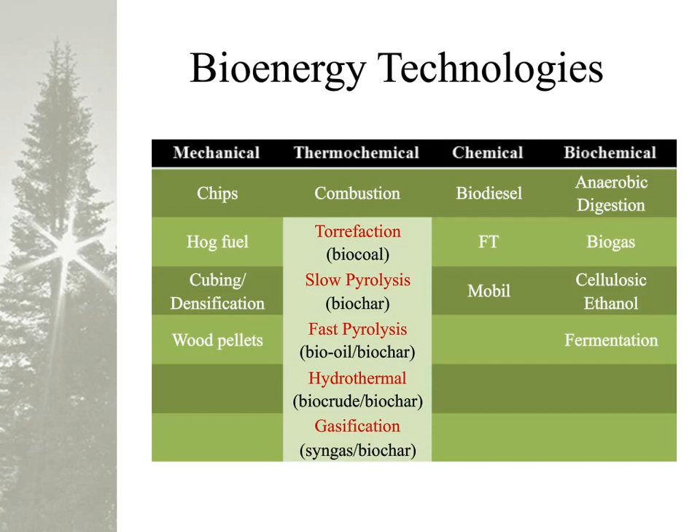In slide 7 is a graphic representation of the thermal gradient that really represents the different pyrolysis technologies. At the low end, you have various processes, including the first major one, torrefaction. Most of the pyrolysis and hydrothermal are in the black region that you see in this graph. At the very top, you have the high temperature range where you get gasification.

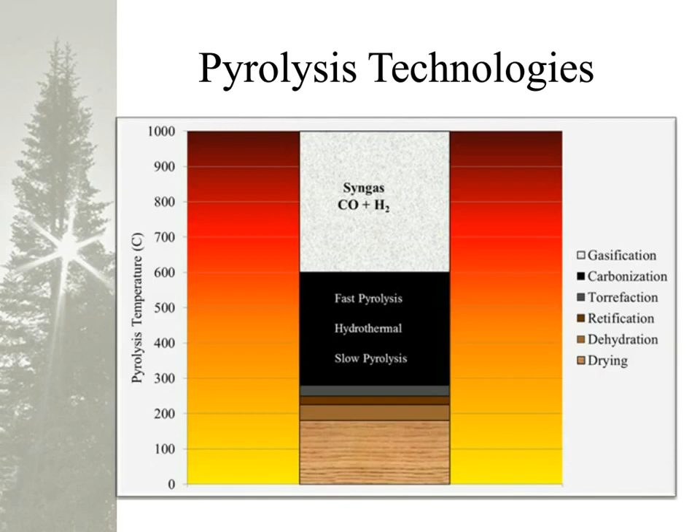In slide 8 is a summary of the over 900 ventures I mentioned to you before. I've broken down here by the different pyrolysis technologies on the left-hand side versus the various regions of the world. We won't go through all the data today, but it just shows a breakdown between the EU, US, Canada, and the rest of the world of where these ventures are found. Now, over 900 ventures is a lot, but of course, a lot of them are only virtual technologies. They're not commercial enterprises, but it's hard to tell which are real and which are not.

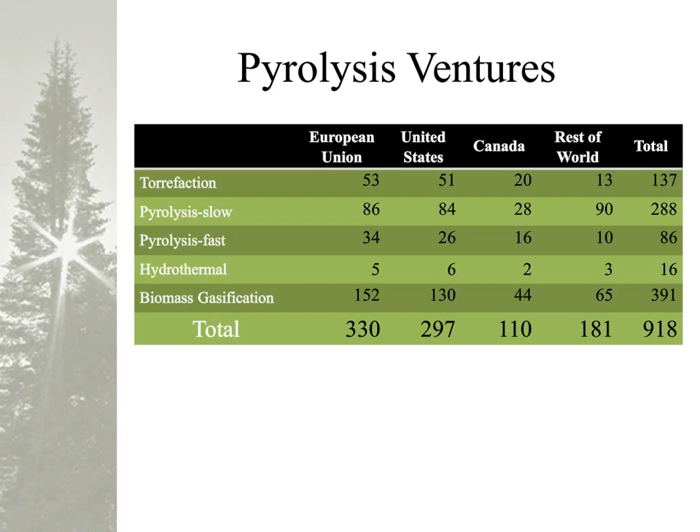The other thing we've done in this database is try to estimate the commercial stage of development of each one of these ventures. Now, this is a debatable definition in its own right. These are the definitions I've used here to separate the different ventures. The one that's probably the most contentious is what makes a true demonstration facility of a technology. Industrial scale equipment is commonly used to define it, but I've also added the category that it must be proven on continuous operation. So in the definitions I've used in the database, this is a technology that has to be run for at least weeks on end on a continuous basis, or a batch for that period of time. Very few of the new technologies actually finish this stage.

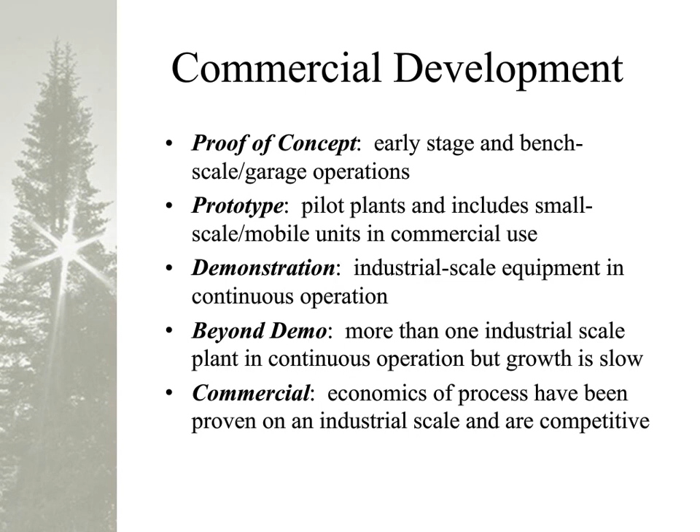On slide 10 is a brief summary of what I call the ashes of pyrolysis. Of those over 900 firms, some no longer exist. You never see announcements usually when they fail, except in very high profile cases. Where they show up is when you go to their website and it's marked under construction or it's dysfunctional.

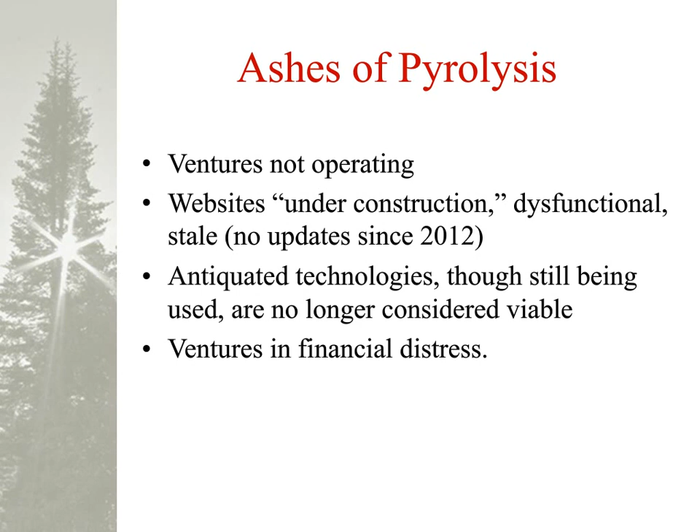Some of these have had no updates - they're essentially stale websites with no progress. Of those 900 firms, this is going into the database as shown in slide 11, an example from the biomass gasification database, where the database has the name of the company. The number beside each company is the degree of their stage of commercial development, followed by a brief summary of the technologies. Some have a lot of information available, some not very much at all. There are hyperlinks included to each entry.

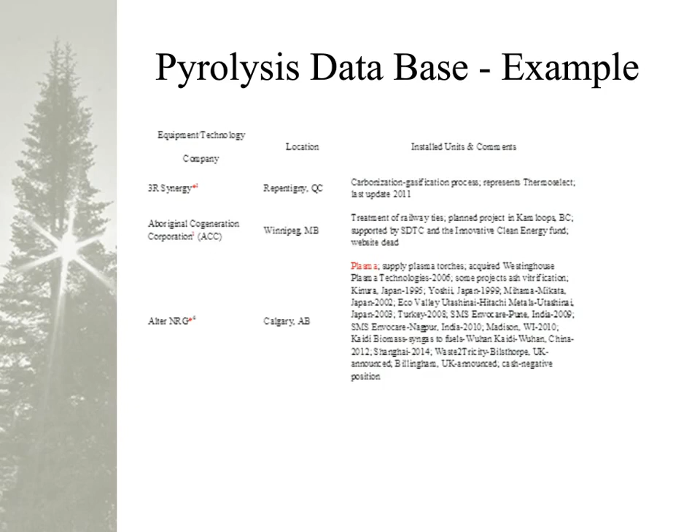On slide 12, we're looking at the different stages versus the ashes and the ones still in existence. Companies in blue represent those that still appear to be operating. The ones in red are defunct. The table divides it by the different types of pyrolysis technologies on top versus the different stages of commercial development on the left-hand side. You'll notice that pure commercial status hasn't been reached yet for any of these technologies. Some of the more interesting ones are on the demonstration side. The numbers here are much more limited, and they're certainly dominated by biomass gasification.

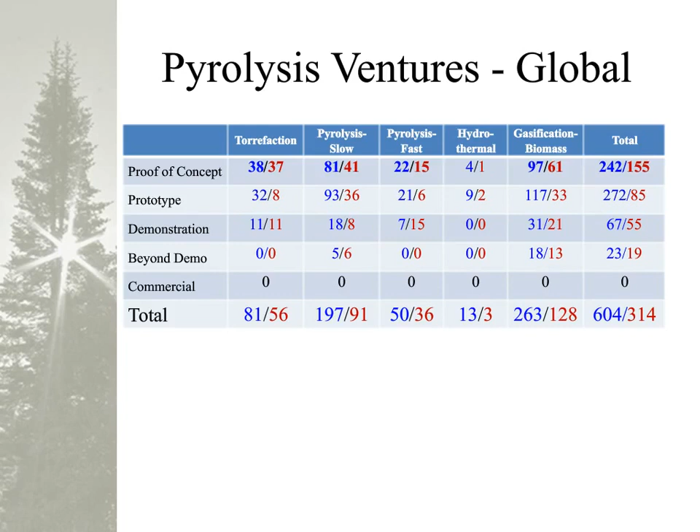I don't mean to be negative about these technologies overall, as there are some very exciting new ones coming into the demonstration stages right now, and the later speakers will talk about this as we go into the other presentations.

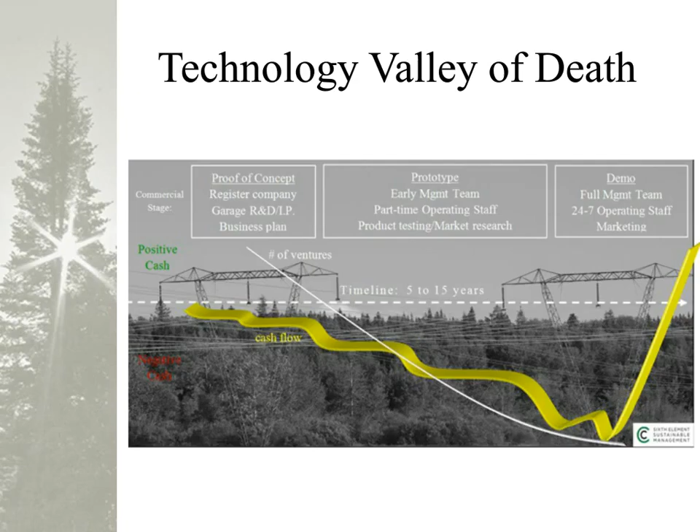That concludes the presentation I have today on pyrolysis commercialization.

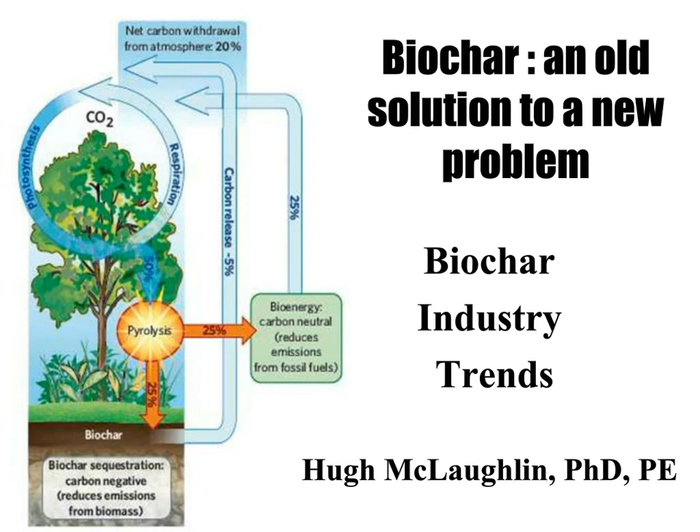I want to establish firmly in people's minds, on slide 17, that a tree operates in essentially a short-term carbon cycle where carbon is cycled from the atmosphere as CO2 gas, through photosynthesis, to become biomass and energy for the tree to live. At the end of the tree's life - and this can happen during the tree's life too - there are sugars produced that are extruded out through the roots, feeding microbes, etc. So there's ongoing respiration, and at the end of the tree's life, it has accumulated biomass, but that biomass will rot. Ultimately, a tree is in a neutral scenario because the carbon spends part of its time in the soil and part of its time in the atmosphere, oscillating back and forth.

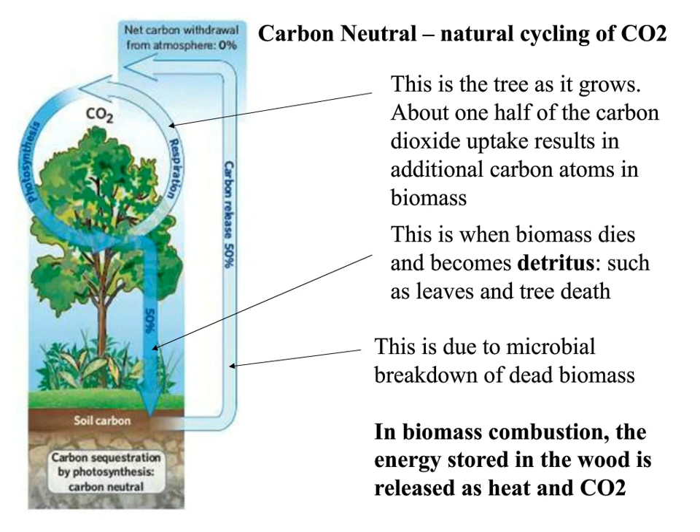On the next slide, 18, if we look closely at a tree's operation - and these are generalities - if I look at 200 carbon dioxide atoms in the atmosphere, the tree will fix them through photosynthesis and then turn around and use about half of that sugar for its own daily diet.

And then the other half will be used either to create additional biomass, additional tree structure, or being used to grow seeds, or being used to feed soil microbes. But if we note up just above the top, it says net carbon withdrawal from atmosphere 0%. And indeed, everything is cycling around.

Now, de facto, if instead of letting the tree die and fall on the ground and rot from microbial activity, we were to harvest that tree and use it for a fuel source, we would in fact be getting essentially the same carbon dioxide cycle. We would, however, be gaining some energy by burning the wood, and we would be displacing some fossil fuel requirements.

So in a perfect world, if we replaced all of the fossil fuel uses with biomass sources, we still would be essentially at a carbon neutral balance for the atmosphere. We would have no mechanism for drawing down the atmosphere.

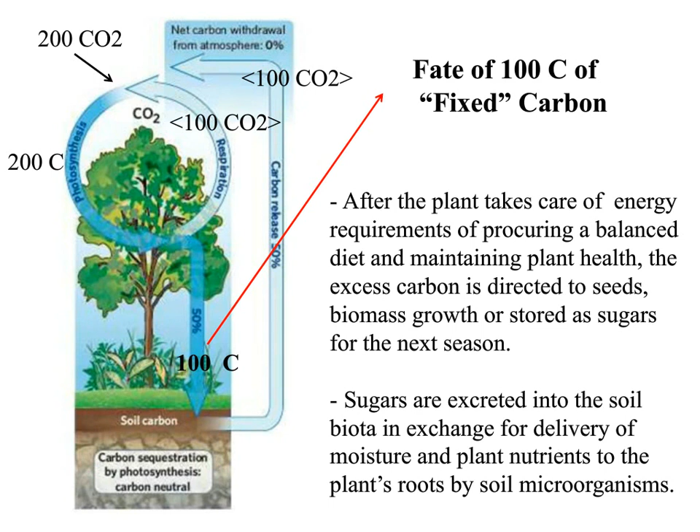And this is where biochar distinguishes itself. If I intervene, as shown on slide 19, at the end of the biomass life—I'm not advocating cutting down living trees, but they're all going to die eventually and they can be harvested.

And we intervene with the carbon and put it through a process called pyrolysis. This is where we gasify or pyrolyze the wood, heat it, devolatilize it, pulling off a gaseous fuel stream, and then convert the solid residue into what's called biochar. That process is called carbonization, making a more carbon-rich solid.

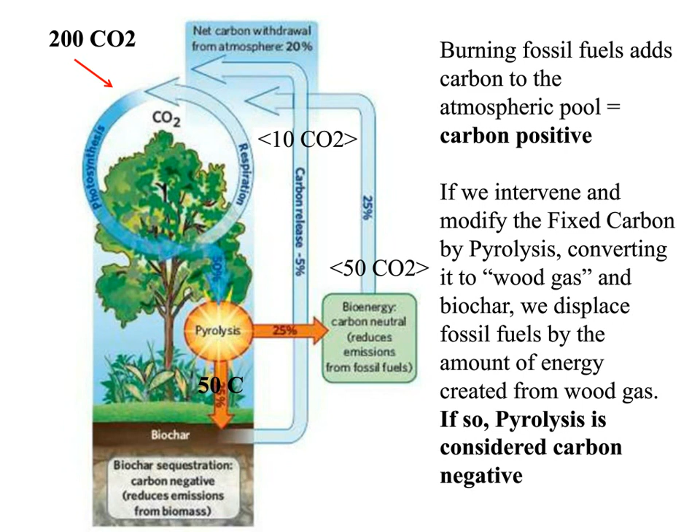So on slide 20, we note that the net effect is that we can pull 20% of all the carbon atoms that the tree ever even encountered, that it ever extracted from the atmosphere, and deposit them in a stable form in the soil. Basically what's happened is the carbon in the carbohydrates and in the lignocellulose has been converted to graphite. And graphite is an extremely chemically resistant and biologically resistant form, and it remains in the soil.

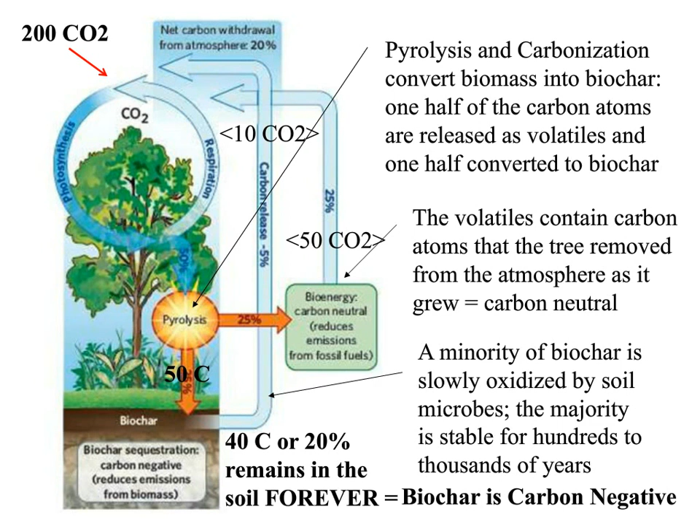And this is really a very pivotal distinction that I need to point out. Biochar and charcoal are chemically quite similar. The difference comes down a little bit to use. Charcoal has basically been optimized to be a fuel, and it's produced at a much lower temperature than biochar.

So charcoal and biochar are both black. Charcoal and biochar are different. And that's a key concept, and it really prevents charcoal industries from selling their fines into the soils and having substantial benefit that we can obtain with a good biochar.

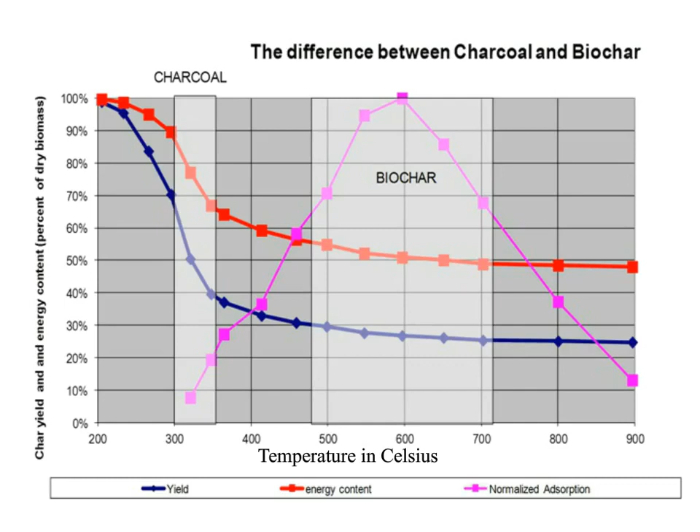So on slide 22, I reemphasize that the real effect of pyrolysis is to have taken some of that uncharred organic matter and converted it into a graphite-rich form, which now has some very unique properties in the soil. But the most important property from the climate standpoint is the fact that it is going to be resistant to biological decay and will be there for 5 to 100 to 1,000 to 10,000 years, a significantly longer time than we normally see.

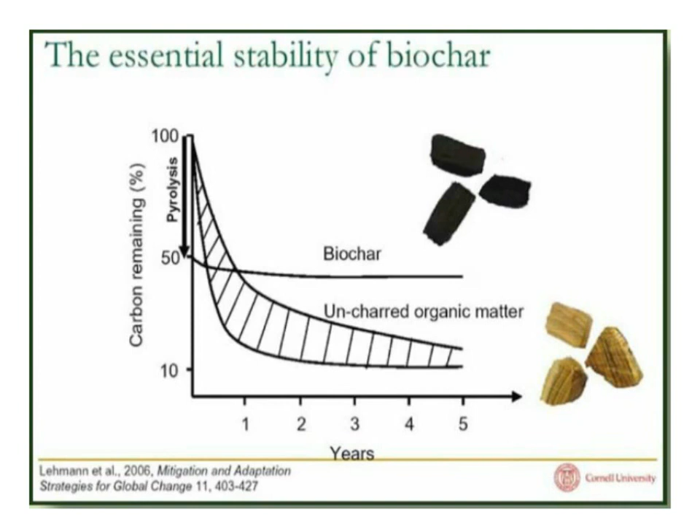So wrapping up, there's a real list of biochar facts, and these all get elaborated into properties that modify the soil and the soil dynamics. I think it's unrealistic to try to go beyond just flagging them. Later, people that are interested can see how they manifest themselves in growing systems.

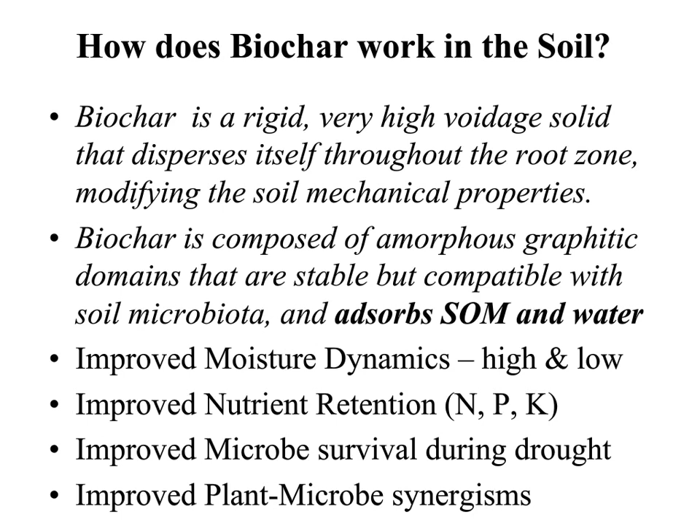And then on my last slide, amazingly, I will get to the topic of my slide, which was: in the past we saw biochar, the phenomena being represented by really almost any black residue, whereas now we're seeing a real migration to quality, with the adsorption property being a major quality and a couple of other metrics like leachable sugars. And what we're now seeing coming out because of the demand for biochar and the potential is dedicated designs to produce biochar of the appropriate quality and also to harvest energy and heat from the process.

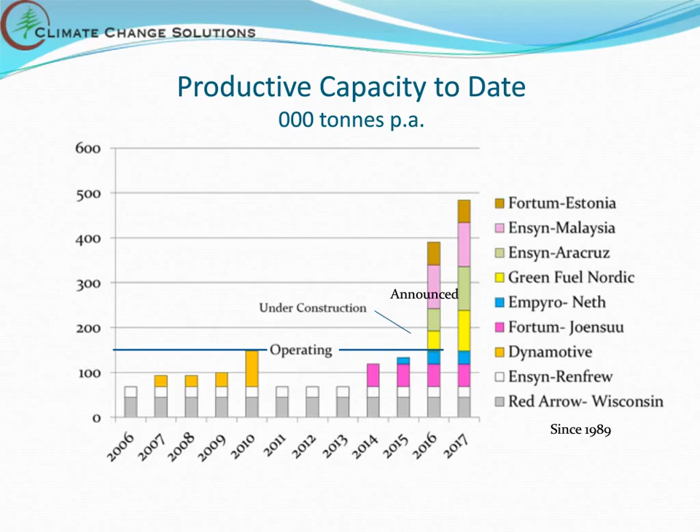Moving on to slide number 29. This is a favorite slide of mine, I borrowed it from Ensyn. You can see that pyrolysis oil has actually been made since 1989, used primarily in the renewable food and chemicals market in the United States. In 2004, it was used to replace fuel oil in industrial situations, and now in institutional and commercial heat applications.

In 2009, Dynamotive succeeded in powering a turbine with pyrolysis oil and fed power economically into the Ontario grid before succumbing to financial difficulties. In 2013, Ensyn succeeded in powering diesel engines with pyrolysis oil, and that's one of its new future business models - to develop power in remote locations by way of fueling diesel engines.

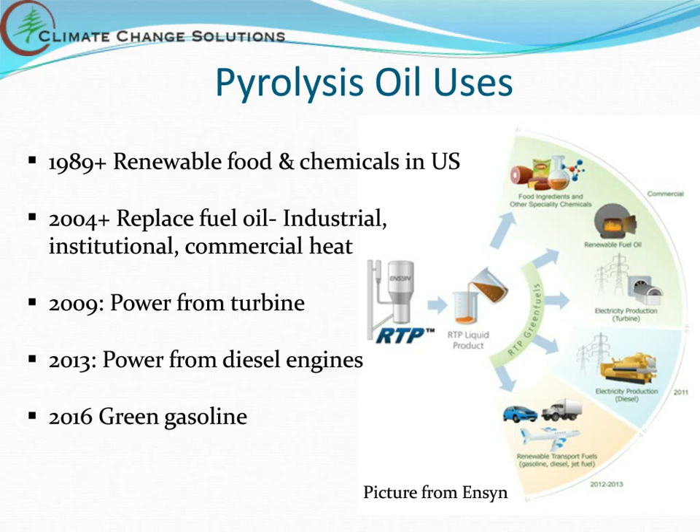I'm going to talk about green gasoline in just a moment. Moving on to slide number 30, the current markets: Red Arrow in Wisconsin has 6 small plants, still in the food ingredients market and building heat.

Ensyn's Renfrew plant still ships pyrolysis oil 1,200 kilometers to Red Arrow and now has contracts to heat New Hampshire hospitals. Keep in mind that not only is it economic to replace fossil fuel with pyrolysis oil, but it's economic to ship it 640 kilometers to do so.

Fortum in Joensuu, Finland now uses it to replace heavy fuel oil for heat at Fortum plants in Joensuu and Vermo, and I just learned that they are now shipping their pyrolysis oil to other Fortum plants in Sweden, and when they reach capacity, they will be replacing light and heavy fuel oils in local district heating plants.

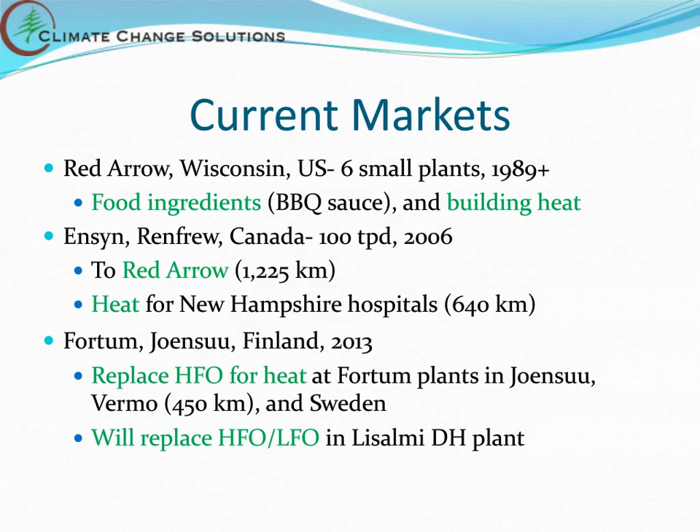Moving on to slide 31, the Empyro plant in Hengelo, Netherlands is using it to replace natural gas to produce high-pressure steam for a dairy and for a multinational coatings and chemicals company. I believe they're also still talking about making heat and power for the University of Twente.

Green Fuel Nordic, which is under construction in Finland, is going to use it to replace heavy and light fuel oil in industry, and also to produce heat and electricity for municipal customers. Moving on to slide number 32.

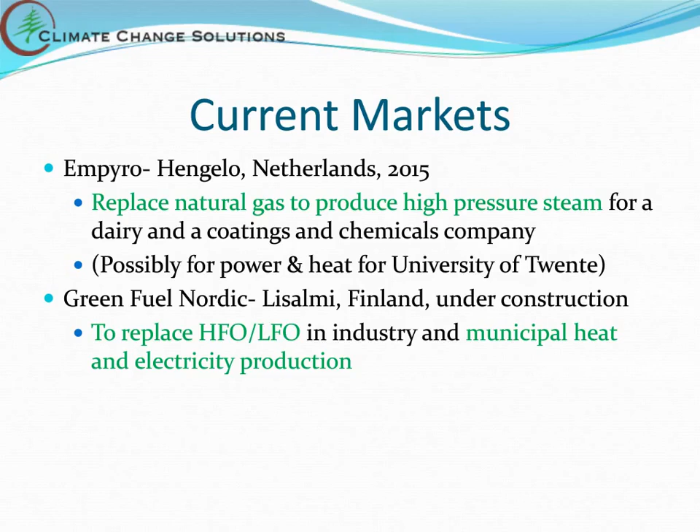This is where it gets interesting - future markets, and I'm not talking about the far future, I'm talking about early future. Ensyn has run over 200 trials on mixing its pyrolysis oil product with crude intermediate in existing oil refineries to produce green gasoline and green diesel, which is indistinguishable from 100% fossil fuel gasoline and diesel. So this is going to be one of its major markets.

Not going to say anything about Malaysia - this is the project whereby they're going to power local areas with diesels. Hasn't been much in the news, so I'm not going to convey any more information about it.

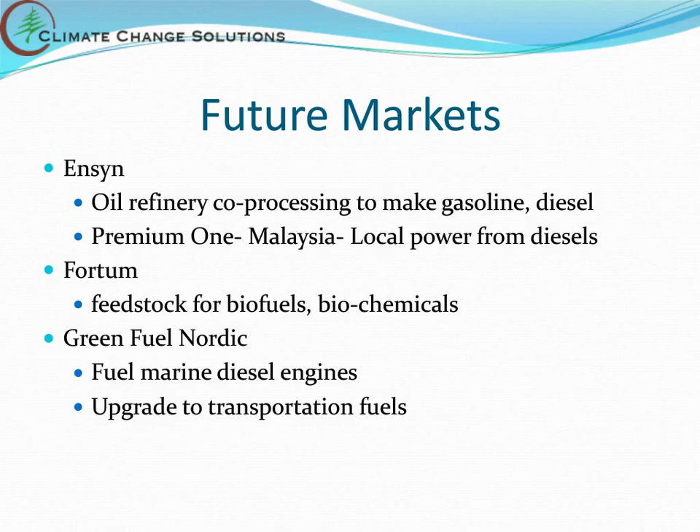They've already announced the second plant in Finland by Fortum. Fortum, UPM, and Valmet recently signed a 5-year agreement to upgrade pyrolysis oil to full transportation fuels - so that is the direction they're taking. And Green Fuel Nordic, also in Finland, has named a number of markets, but also added the possibility of fueling marine diesel engines.

If the oil price goes back up to the $80 per barrel level, which it is anticipated to do, this market increases to 18.5 million tons.

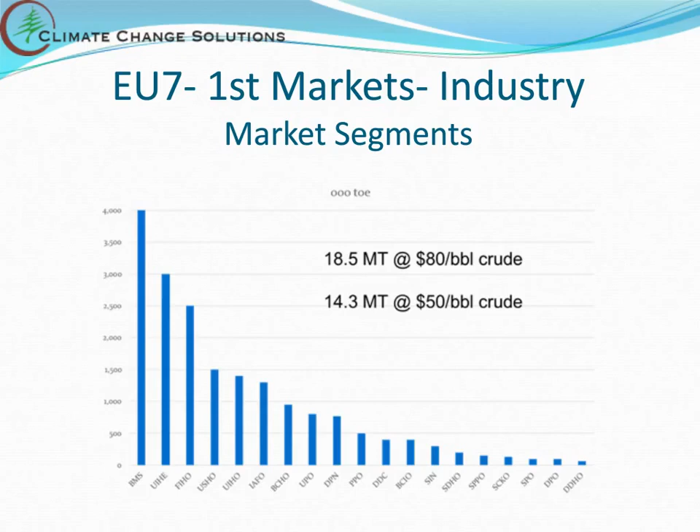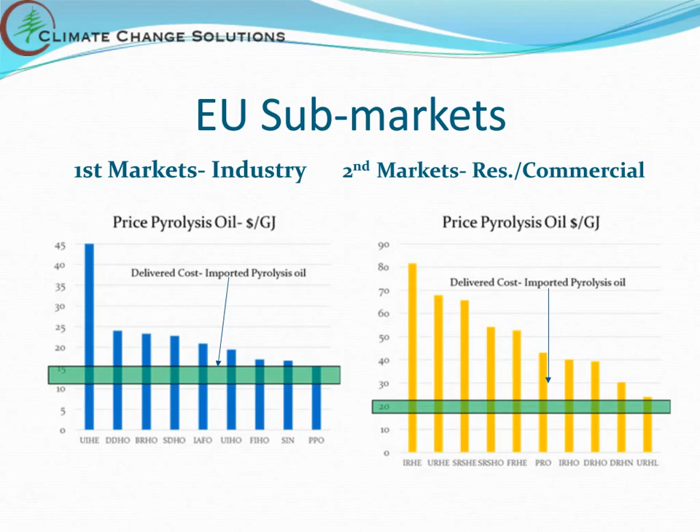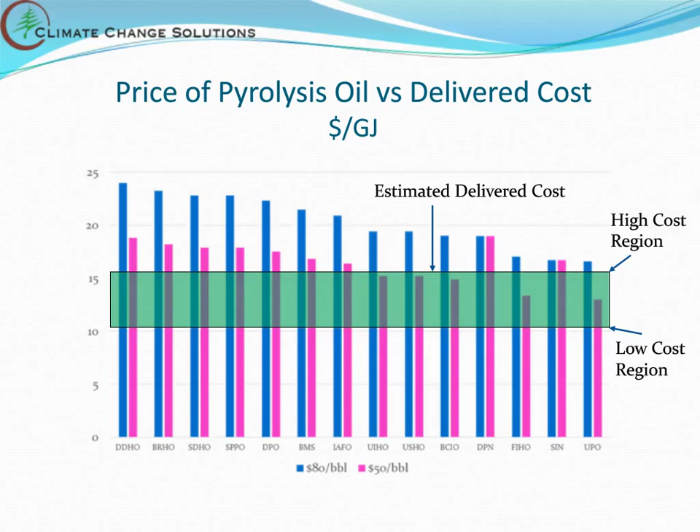You can see that there's still a number of markets on the left which remain lucrative even at these low oil prices. On the right side there are some sub-markets that may only be willing to pay $13, $14, $15 a gigajoule, and they will be forced to buy pyrolysis oil from some of the lower cost regions like Malaysia. Moving on to slide 36.

Now let's talk about Japan for a moment. Most Japanese power companies are multi-fuel; in other words, they make their power from petroleum, LNG, and coal. They're trying to increase their renewable fuel by adding pellets to the coal. Some of them are reluctant to do so because of the increased cost of infrastructure and also the limits to the amount of pellets that can be added to the coal.

Now look at Kansai. 29% of its fuel is petroleum, so they don't even have to go the pellet route. They can simply replace their oil burners with pyrolysis oil burners, add some stainless steel tanks and piping, and they've got their renewable fuel. Moving on to slide number 37.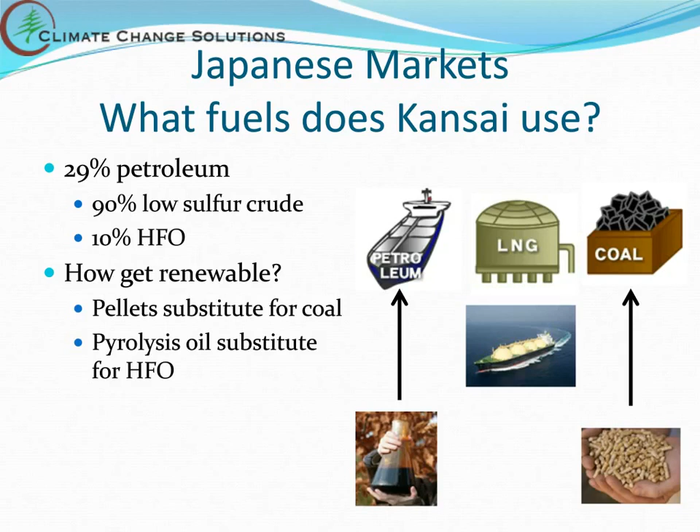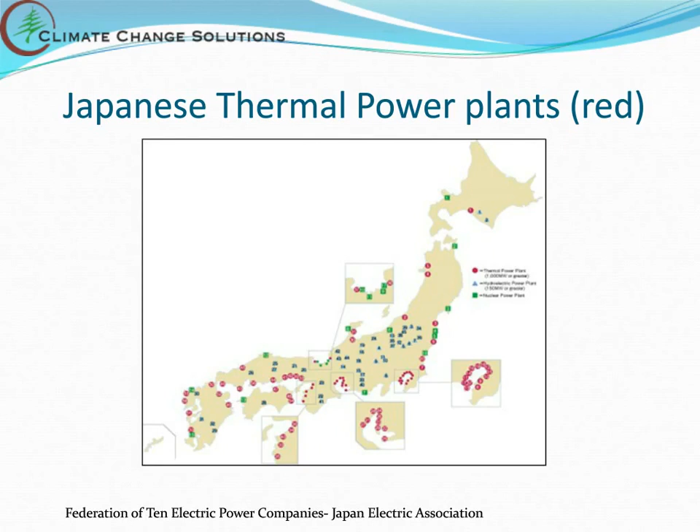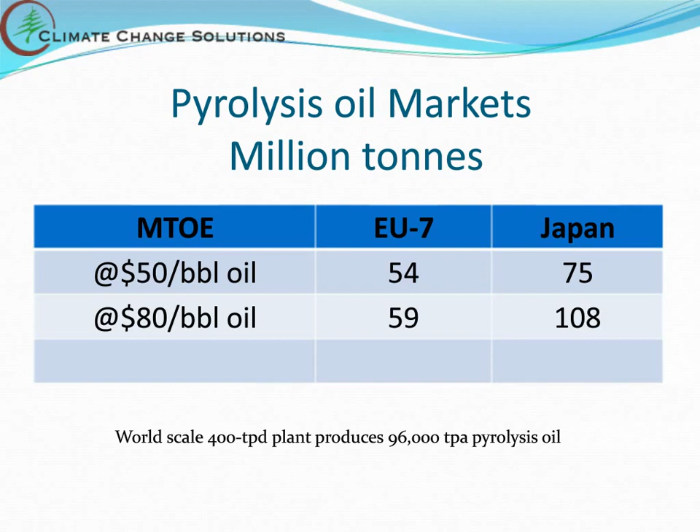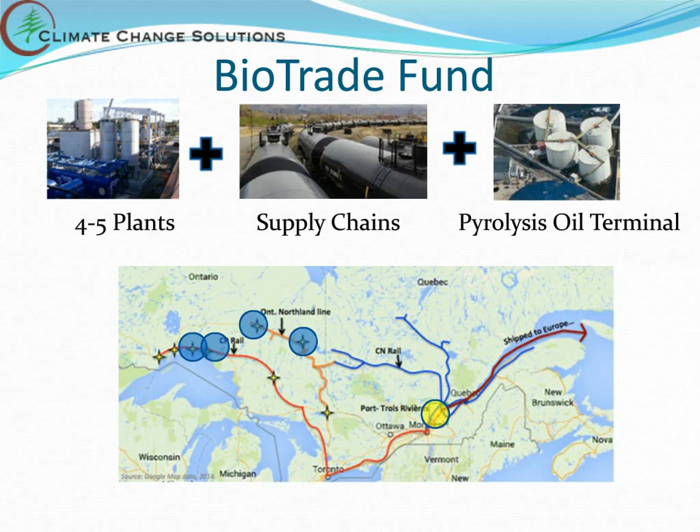I'm running short of time, so I'll blow by this one. I'm simply trying to put together a biotrade fund that will invest in plants, supply chains, and terminals worldwide to export pyrolysis oil to needy markets.

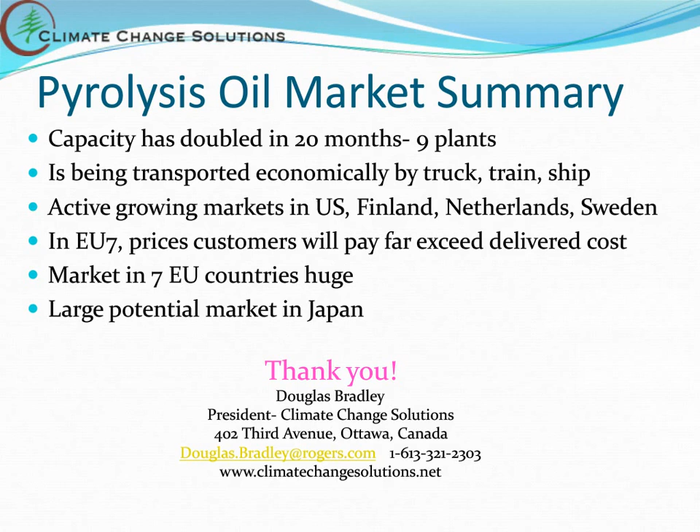Just in way of background, for those that are not familiar with Zeton, Zeton specializes in the design and fabrication of pilot plants, demonstration plants, and small modular production plants. In the last 10 years, we've designed and built a lot of pilot, demonstration, and production plants for pyrolysis processes, and that will be the focus of our presentation today. So moving on to the next slide, which I believe is slide 42.

Title of my presentation is Scaling Pyrolysis Technologies.

Pyrolysis pilot plants and demonstration plants have been notoriously difficult to scale up. There's a number of reasons for that. We'll cover some of those reasons in the presentation today, and I'll also give some examples, some photographs of some of the plants that we have built successfully.

The good news is that the methodology for scaling bioenergy and biofuel technology plants, including pyrolysis plants, follows a similar scale-up process to what is traditionally used in the CPI, the chemical process industry. So what are those steps that are used in the chemical process industry?

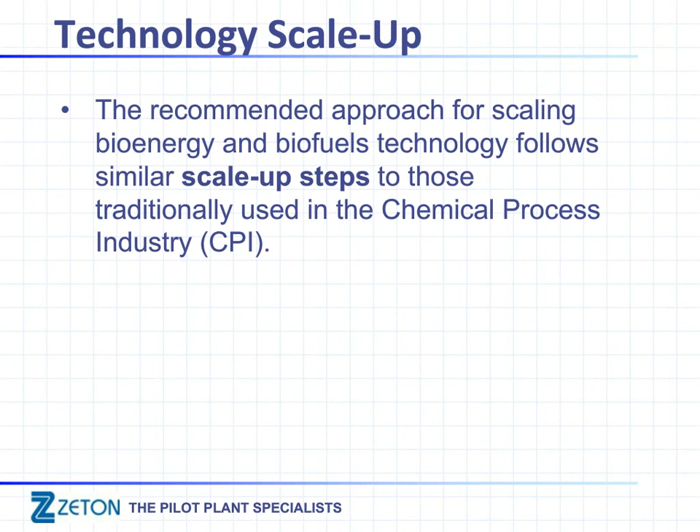Traditionally, it's been a 4-step process, beginning at the lab or bench scale, where small plants are used, often in batch or once-through type configurations, to generate some raw data. Based on that raw data, some initial data is produced, which you then scale up to a pilot plant. The pilot plant is really the main tool used in process development. It's often where you are doing continuous production for the first time.

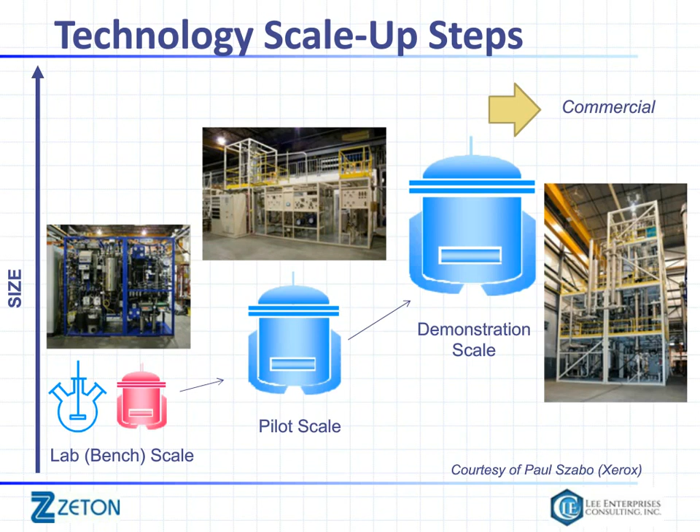The plant you see there is actually an FCC pilot plant, fluidized cat cracking pilot plant, that's been converted to a bioenergy process. From pilot plants, the need often goes to a demonstration plant, where you are operating the plant continuously for many weeks on end, producing significantly more material, often for market testing. Then beyond demonstration, for the processes that make it through that stage and the funding's in place, the plants then go to commercial.

So what are some of the challenges that are faced by pyrolysis processes as you scale up from lab scale to pilot to demonstration to commercial? Here are some examples of the types of challenges that are typical of these thermochemical conversion processes: solids feeding, solids processing, including char handling for pyrolysis processes in particular, tar formation and removal in gasification processes, bio-oil condensing in pyrolysis processes, and hot gas filtering in both pyrolysis and gasification processes.

Bio-oil upgrading, stability, and the varying physical properties of bio-oil — for example, the density of bio-oil can vary from being greater than water to less than water, and in any type of processing scheme, that can cause complications. High temperature solid circulation, hot ash removal, pressurized solids feeding, and a few others are all examples of challenges. The last one is varying physical properties of biomass, for example, moisture content and physical size as well. So these are some of the challenges.

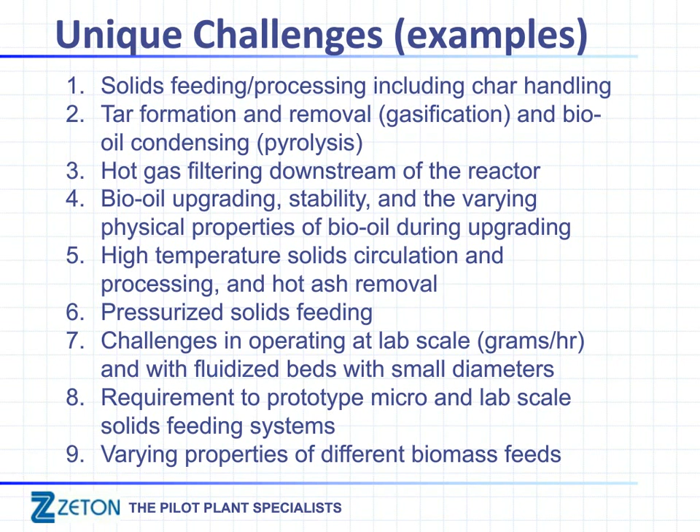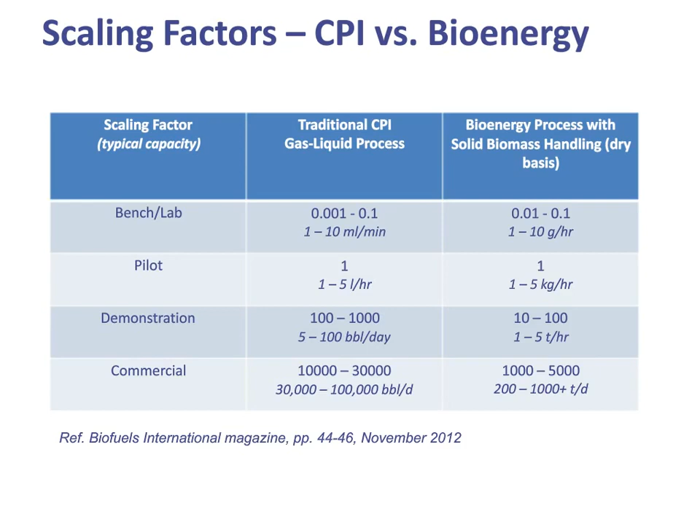The next series of slides really present some photographs — a picture's worth 1,000 words. So here are some photographs of some plants that Zeton's built. We've altogether completed over 750 projects, many of which were for bioenergy type processes.

Here's a lab-scale solid feeder which can feed at pressures up to 700 psi at rates up to 100 grams per hour. So very difficult to feed very small flow rates of solids. This is a custom batch feeder that operates at high pressure.

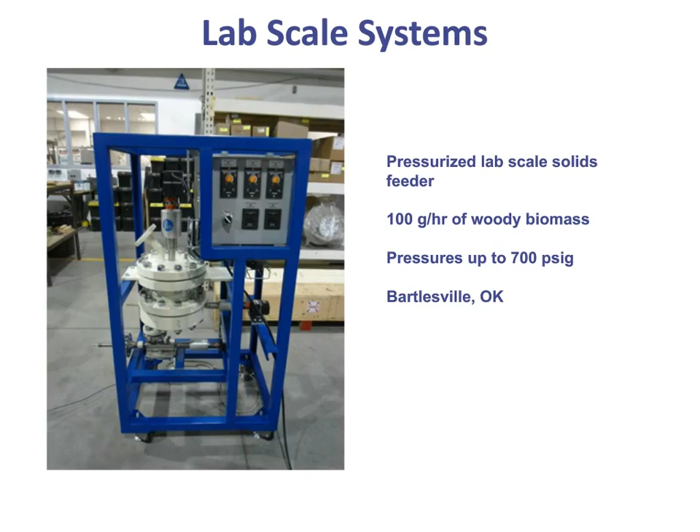Another example is the next slide, slide 49, which is a lab-scale ebullated bed reactor for bio-oil upgrading — taking pyrolysis oil and upgrading it using hydrogen to create a fuel. This operates at 25 grams an hour of bio-oil feed. It's a continuous plant, actually, and operates around 450 degrees C.

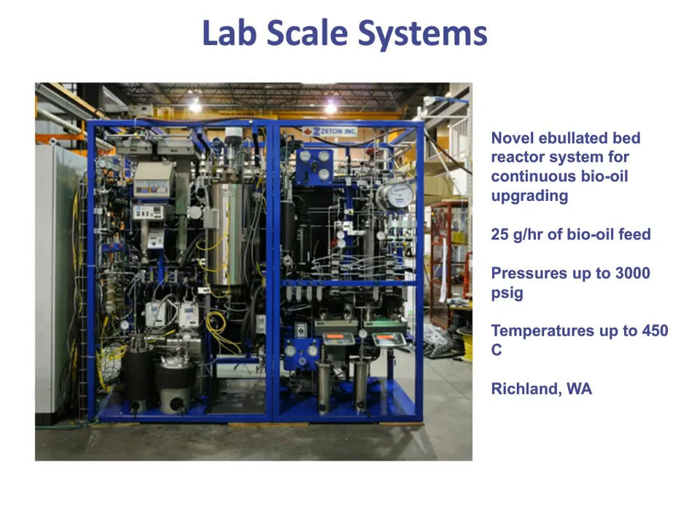Scaling up now to pilot scale — this is slide 50. This plant, as I mentioned before, is an FCC pilot plant that's been modified to convert to bioenergy. So it's a biomass catalytic cracking pilot plant operating at 1.5 liters per hour.

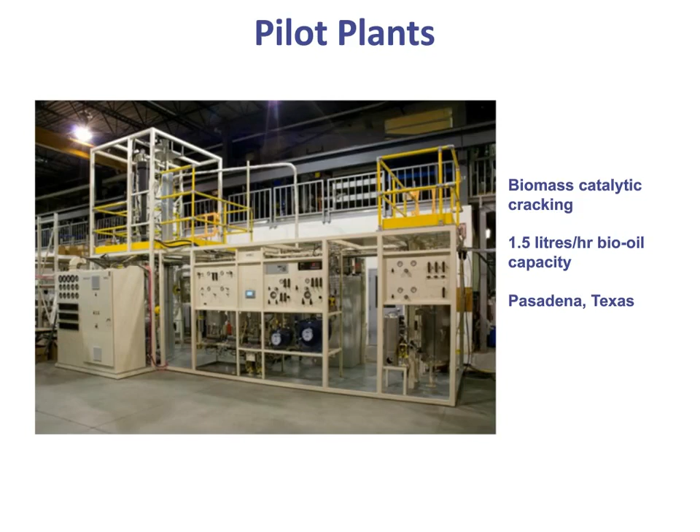The next pilot plant is an IH2 pilot plant, which has an integrated pyrolysis and hydroprocessing step combined together and operates at 2 kilograms an hour. This process is currently being scaled up to commercial scale.

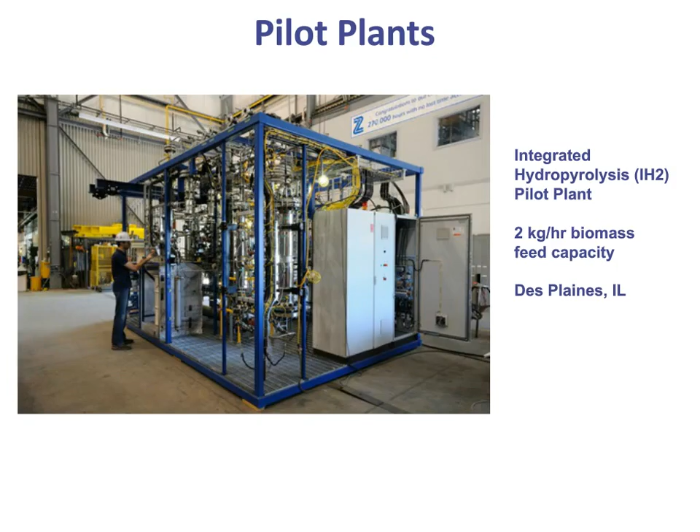Here's an example of a demonstration plant at 15 barrels per day, which was used to produce commercial quantities of bio-oil for testing purposes, operated in Pasadena, Texas.

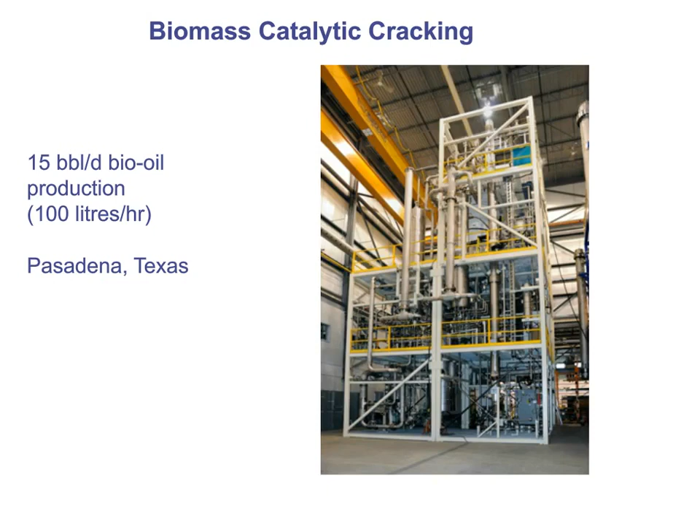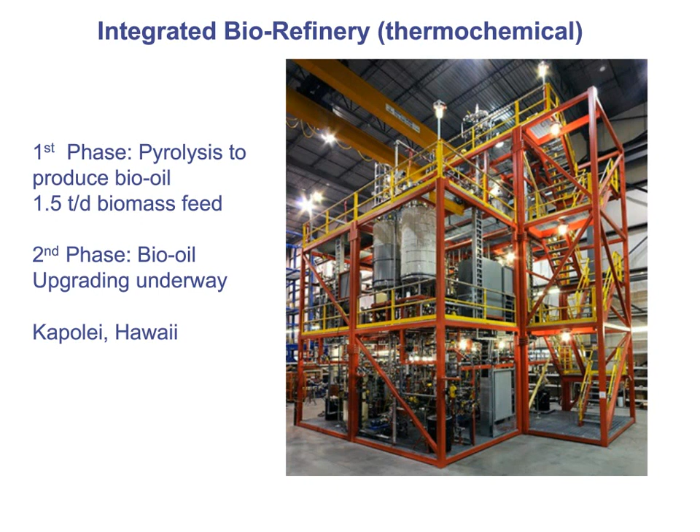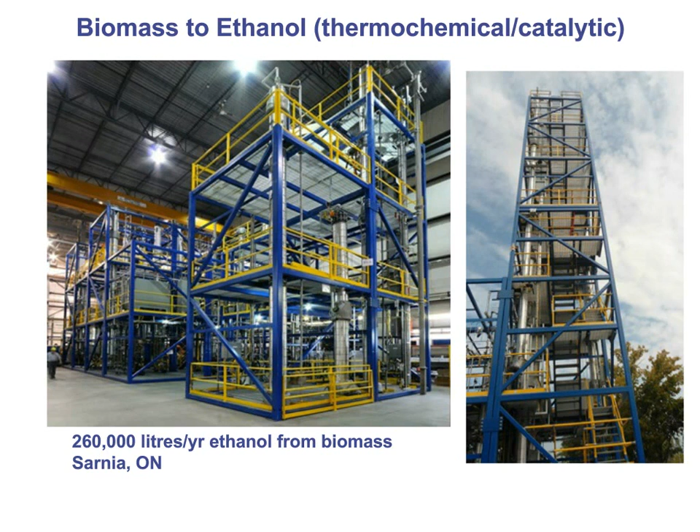The next few slides, this slide is the final demonstration project. It combines thermochemical processing with catalytic processing to take biomass to ethanol, at 260,000 liters per year of ethanol from biomass. The next three slides are commercial plants.

This is a plant for Red Arrow that was built in the 80s, 25 tons per day of wood feed, making a chemical which is used as a food ingredient in barbecue sauce, and is nicknamed the liquid smoke process.

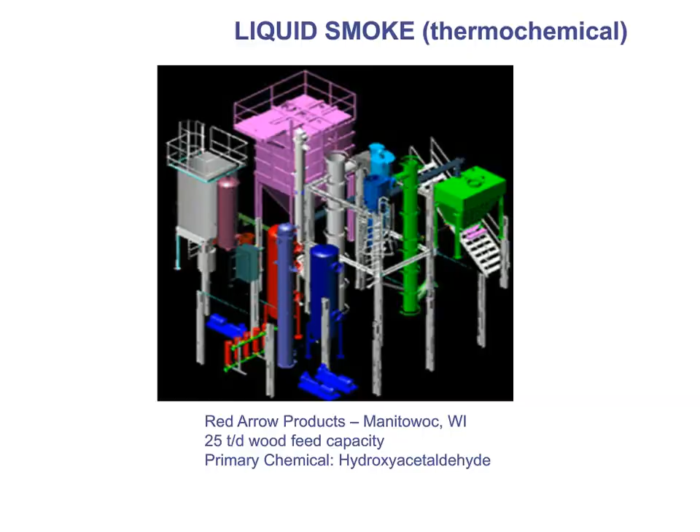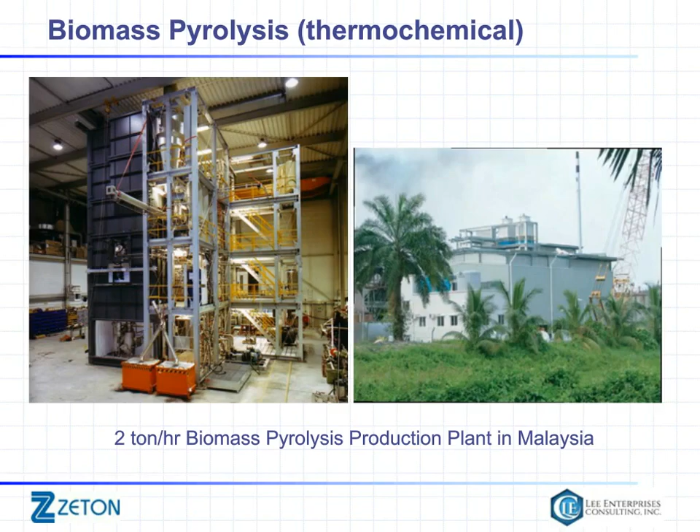The next plant was shipped to Malaysia. It's a 2-ton per hour biomass pyrolysis plant, which was operated in Malaysia. And then this process was scaled up even further to a production plant, which is now operating in Hengelo in the Netherlands at 5 tons per hour of biomass feed. That's a fairly new project.

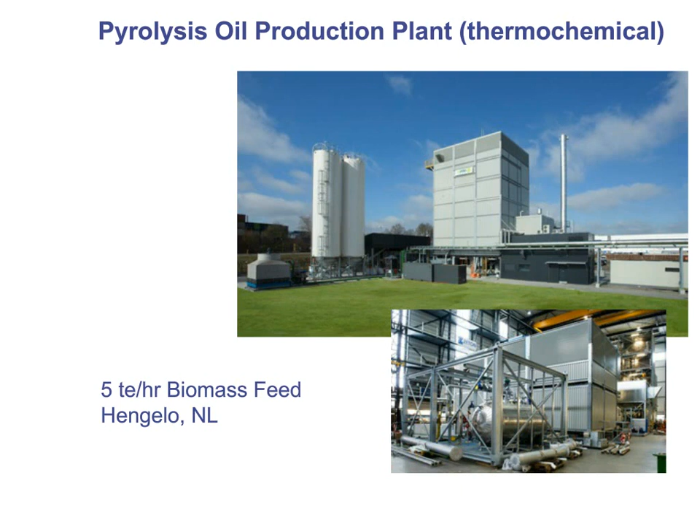This slide is a little bit out of date, probably 2 years out of date. I apologize for that. Not all these projects were built by Zeton, but you can see the companies that are operating at different scales, from pilot to demonstration to production.

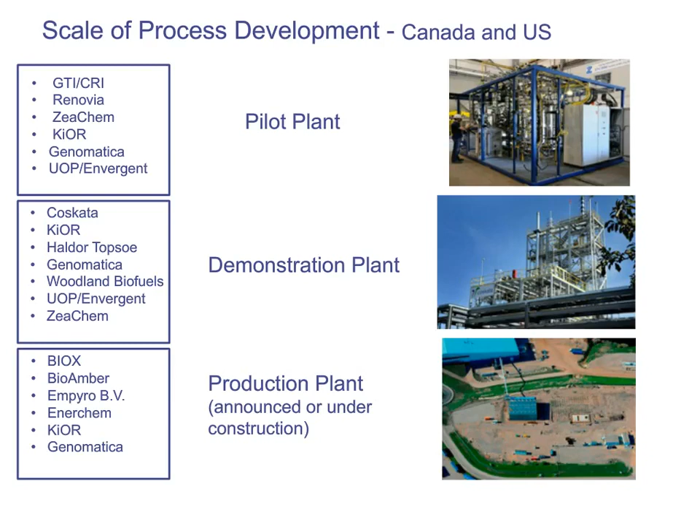My final slide is slide 59. This information was presented, some of it in a paper, and for those interested, I'd be happy to provide a copy, talking about some of the solutions to the problems that pyrolysis processes cause as you scale them up. Thank you very much.